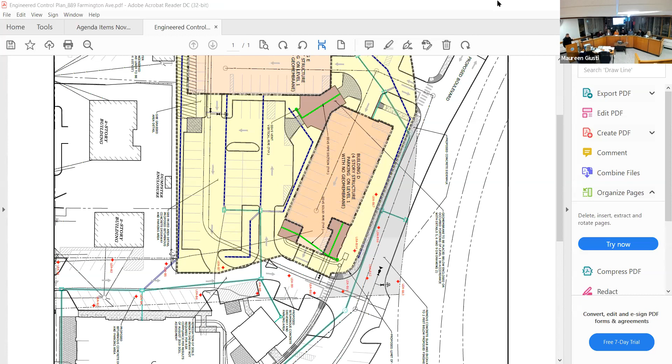Thank you. Again, Joe Perugini, professional engineer with Weston and Sampson. We have an office in Rocky Hill, Connecticut. The plan that I have, obviously you can't see it, but in your plan set it would be sheet 205. It's an overall site plan.

We're here on behalf of the applicant and owner, Kevin Budney, of Budney Overhaul and Repair. We're seeking a site plan approval for a proposed shipping and distribution building. On the property, it would be located in the northeast corner. This property is at 2061 Berlin Turnpike. It does have frontage on the Berlin Turnpike, but it's connected with other properties associated with the facility.

It's in the BT1 zone, and a lot of folks may recognize it as the former driving range. Currently, the development is to be located in the northeast corner because it would be situated adjacent to the existing facility and parking. It's going to serve the existing facility, which manufactures aerospace components and products. And this is a 5,000 square foot building, only for the purpose of shipping and distribution.

So it's going to have 4 overhead doors, a couple of man doors that face the north side. The pavement associated with it is only what's required for a driveway and for trucks to be able to maneuver into and up to the overhead doors.

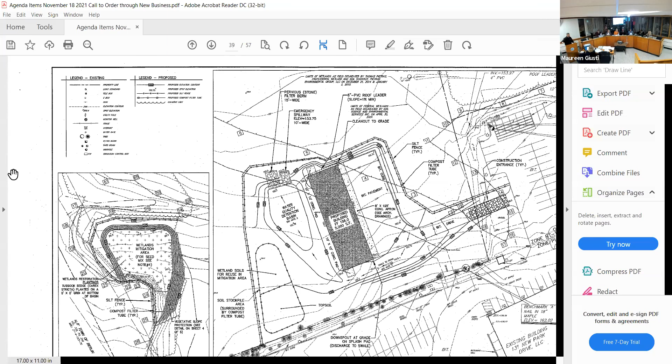I brought up the plan sheets on the board, but obviously his is in color and a little more detailed. On this plan, north is to the right, and the Berlin Turnpike is along the top of the page to help orient yourself. Along the left side of the page, which would be the southern border of the property, there's a strip of land that is between the southern property line and New Park Drive. You can't really see it there, but it's kind of sandwiched between New Park Drive and the southern border. That area itself is all wetlands, or mostly wetlands, and it's wooded.

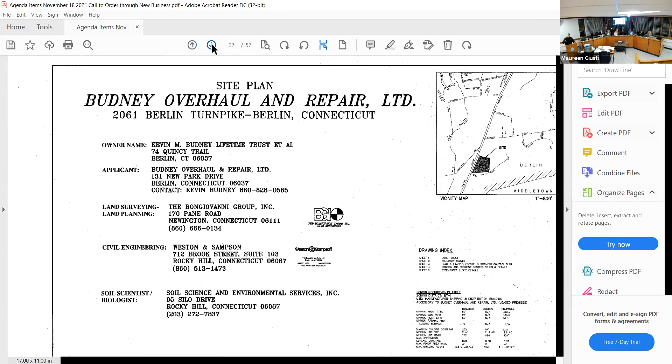But you can see within the middle of the property, we have red lines which indicate there's wetland soils that extend through there. It has been developed in the past, but the wetland soils are there. So because of where the proposed development is, a portion of it, the intent was to keep it obviously away from the wetland soils, but some of it is causing that disturbance. So this went before the Inland Wetland Commission.

It was presented, and to compensate for that disturbance of the wetland soils, we propose to recreate an equal amount, as you can see there in the southeast corner. So that is better suited and located to mitigate what's being disturbed, but it's also closer to an existing and better functioning wetland area. That was approved at the last wetland meeting.

As far as the development, I gave you kind of the specifics. In brown is the building. It's a 5,000 square foot building. There's not a whole lot to it. It's fairly simple. It's connecting to the existing parking lot.

There's no new parking required because there's a surplus of parking already there. So the 2 spaces that technically would be required for this would be used in that existing parking lot to the north.

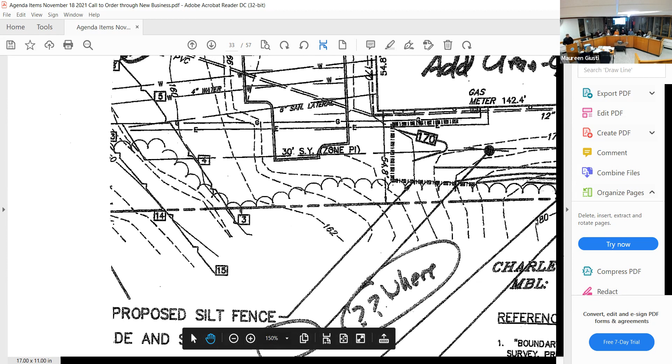Because we're proposing some added impervious area, you've got the roof runoff and the pavement runoff, we're going to offset that by having it drain towards the south or rear side of the building. It's just going to flow overland into, you can kind of see it's graded, it looks like a depression.

It's a pre-treatment sediment forebay. That will slow the runoff down. It will treat it, and it will create a little bit of detention as well. Then the runoff will have to pass through a stone filter berm before it continues, as it would naturally flow towards the west and south.

It's about a 1 acre area of work, so we're going to propose sediment controls. We usually like to double up our measures with a silt fence backed by compost filter tubes. That's the new requirement Connecticut DEEP is going for whenever you have steep slopes, or within an upland review area, or a nearby wetland area. There will also be an anti-tracking pad to help reduce sediment from being tracked onto the parking lot and adjacent road.

To complete the project, the area of disturbance will all be stabilized with topsoil and seeded for turf establishment. The next set of permitting would be during construction for a building permit. I believe the builder is here as well, in case you have comments on the building. That ends my presentation, I'd like to open it up for questions.

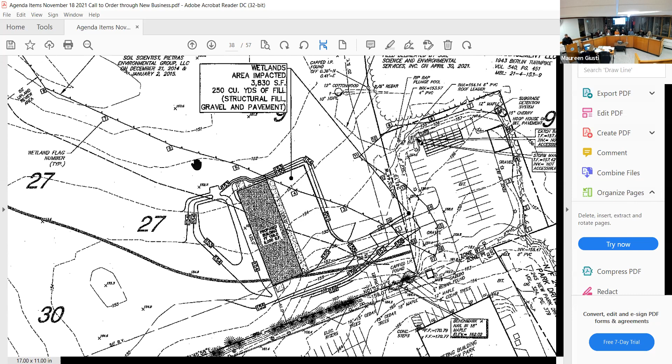Okay, terrific, thank you, Maureen. So I want to clarify for the commission that in your packet you have town engineer comments — those were inadvertently put in for this application. They were the comments for Budney's last review that you've already seen, in addition to his existing building. However, the wetlands review and approval was included in your packet dated November 10th, signed by James Corbel. We did not have architectural plans to review, so I hope their builder may be able to present to you what they have with regard to that, or I would suggest they get held off to show us those.

I don't have comments from the town engineer at this point. One recommendation is that when the error was found on the two separate applications, he didn't have time to prepare written comments. He did say he recalled looking at it and believes there was nothing outstanding that couldn't be resolved, but would be open to it returning to the commission if he found something that needs to be resolved. So the engineer is at this point satisfied, but he's going to take a closer look at it, and if he finds anything, he'll report back.

As far as the architecturals and what's going to be with the building, that's also part of this — I think he said the architect was here. Is there any questions at this point from the commission?

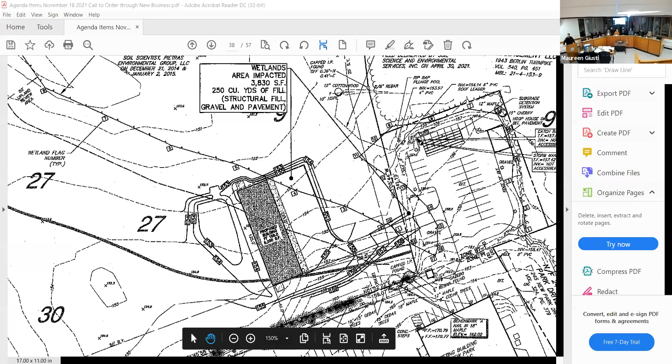All right, so what is the pattern as far as the truck travel goes — how are they going to enter into the site? So they will enter the site on New Park Drive, you can see that on the plan. That's the existing driveway of the adjacent facility. They'll use that existing driveway, head north to the right, take a left into that parking lot, and then turn down into the proposed driveway, which is the darker pavement color.

I'm trying to point with my hand — so this is New Park Drive over here, this is the existing driveway into Budney. Their main facility right now is over here. There's an existing parking lot at the far north end of their site, and the driveway into this addition, this new building, would be off of that driveway.

Along the park, is it pretty much just regular vegetation growth there along that way? Oh yeah, along the southern border. When you come in onto the park, is it heavily vegetated there along that road, or is it pretty exposed? This is New Park. You're talking, is it vegetated here or here? The driveway — yes, there's a fair amount of existing vegetation.

They're not going to be disturbed. The development is lower in elevation, so the driveway is going to slope down. This building will be lower than the parking lot here - there's several feet, 5 or 6 feet lower than the parking lot.

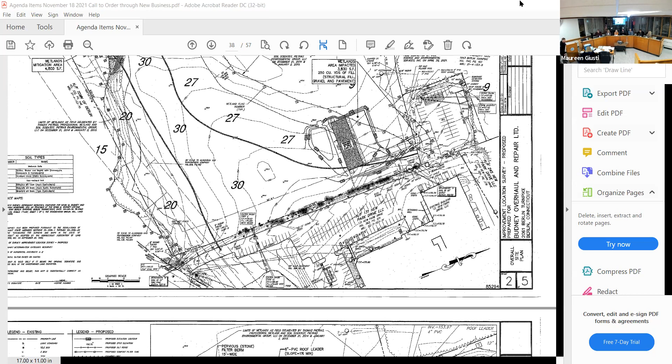And the hours of operation are pretty much Monday through Friday, regular business hours. No, actually they tend to be Monday through Saturday, probably two shifts. That building probably will not be used during evening or nighttime hours. Shipping is minimal, but it's basically a place to store their parts, finished parts, and then they carry them and ship them out afterwards. Right now, they have no room in their facility for storage of finished materials, finished parts.

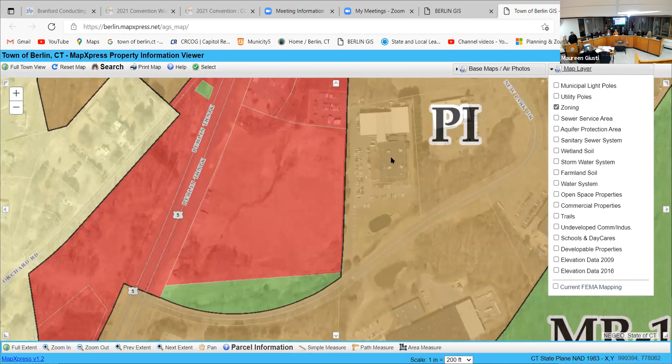Commissioners, do you have any questions? Oh, I'm sorry, that's right, I brought you up - waiting for my cue.

Okay, thank you. For the record, my name is Jonathan Festa. I'm with Pelletier Builders. We've designed the building. We've been working with Kevin for the last couple of years on this project, and I think you know he has other plans in the future. I'm located at 138 Main Street in Coventry, Connecticut.

Go ahead, is there anyone on the commission who has any questions at this point? Maureen, do you have any concerns or comments? I do not - it is a site plan application, not subject to special permit criteria, so it's pretty cut and dry as far as meeting criteria.

I do want to point out that you also have a letter in your packet from Chris Edge. I don't believe he's on the meeting - I can stop sharing and make sure. Oh, he's here, he's actually here.

The other thing too is we want to look at signage - or is there going to be any lighting? The lighting is, as Joe described, only going to be down lighting in the building. There won't be any parking lighting or street lighting. All right, and we do have a letter or communication from Chris Edge on this application as well.

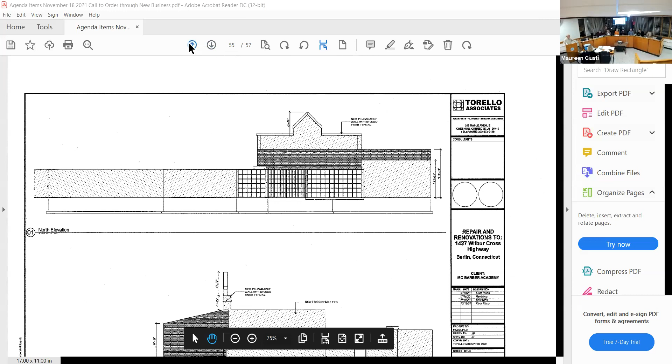Unfortunately, because the licensing procedure for MC requires you to have an address, when he came to discuss this with staff and this commission, it appeared to assume that the vocational academy was going to be located in the front section. So that was approved at that point.

To prove the point, if you drive up Berlin Turnpike coming towards the site, you'll see there's a billboard that is not in the name of MC Barber Academy. It's the name of MC Barber Shop. So it's a separate but allied facility.

So normally in cases like this, you would have a primary use on a site and an accessory. Now, the accessory use is the larger one. That's what he came in for by name. So that's why this happened this way.

So we just want to make sure that the modification we're coming in for now doesn't apply to a whole new site plan review. We want to use the existing site and existing building footprint at this point, because I think they have the right to use that, as long as they're able to reconstruct the part that was demolished.

So the elephant in the room is really one of the conditions of approval we need to address by going to the Board of Zoning Appeals. And that is the fact, if construction is still underway, do we have to remove the storage container on the site, which has been popularly called a shipping container. Of course, our argument would be that if it's not used for shipping, it's not a shipping container. Now they're used as storage containers. So the question is, can it stay on the site temporarily?

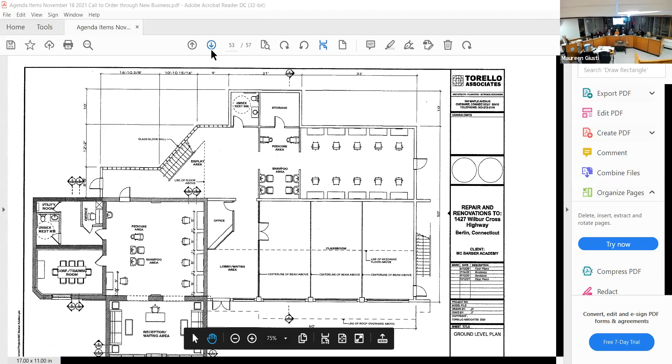As I stated, an affordable housing plan has been submitted and revised, and the architectural drawings have been submitted. The property is currently occupied by 5,248 square feet of motel consisting of 10 buildings with an existing parking lot capable of 11 parking vehicles. It is expected that the proposed residential housing project will be occupied or visited by 30 to 40 people on a daily basis. The plan provides for 2 parking spots per unit, with 1 parking space being a garage space. The proposed residential development is projected to generate 237 trips a day.

All of this traffic data is provided by Scott Heskins' traffic report, which was submitted with the application. It was actually more than the regulation required; the regulation requires only a traffic statement, but in case the commission thought a more detailed traffic report was necessary, the developer submitted a complete traffic report for the commission. The proposed residential development is supported by the existing infrastructure of the town, provides appropriate landscaping and screening, is designed to meet all emergency access requirements, is in harmony with existing neighborhoods, and meets the dimensional and development standards of the regulations.

The application is also consistent with the plan of conservation and development, which I think is very important. Most of the new housing developments along the Berlin Turnpike for the last few years have been set back quite a bit from the road. This will actually be a housing development set right up on the road, and it will be subject to the Berlin Turnpike design guidelines for lighting and other things. As the plan of conservation and development stated, what we're trying to do with the Berlin Turnpike is refurbish some of these older, dated projects into a more cachet type of housing project, and a more permanent, stable housing development. At this time, it's also going to provide affordable housing and housing diversity, all of which will benefit the town. At this time, I'll turn it over to Jim Cassidy to review the engineered drawings and other calculations related to the proposal.

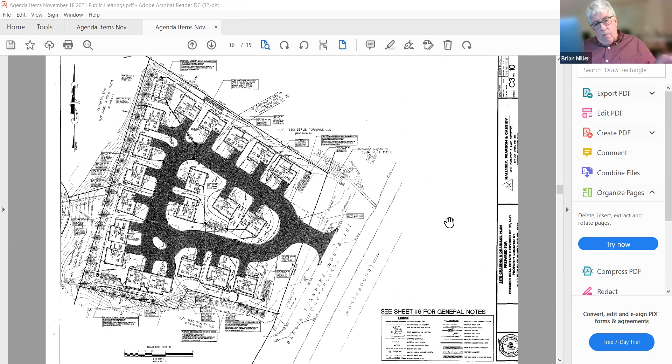For utilities, presently there is a water main in Berlin Turnpike. There'll be a new water service brought in along the main drive and then around the circle, providing individual potable water services to each one of the new units. It will also provide a couple fire hydrants to provide fire protection to the units within the development.

For sanitary sewers, as the property naturally grades to the west, there's presently an existing sanitary lateral that goes out to the roadway out back. It is a 6-inch lateral, which will have to be replaced with an 8-inch lateral to accommodate the units, but it will continue to go in the same direction with the new system tying into the cul-de-sac out back.

All other utilities - electric, telecom - will all be underground, whereas today they are overhead utility services.

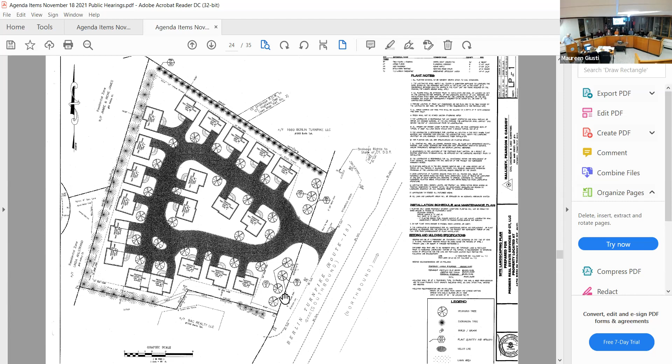Within the development itself, we're looking at having a series of street trees along the frontage to provide screening from the Berlin Turnpike. And basically what we try to do is create one street tree in front of each one of the houses, to give it that New England street feel with a nice ornamental tree in front of each one of the houses. In addition, one more page.

In addition, what we've done is typically want to dress up one of the units. So what we've done is provide a page - this is the foundation landscaping plan for each one of the units. So there's basically a palette. What it does is make a recommendation on shrubs and plants that should be planted along the sidewalk and up along the driveway. There's a table on the plan with plants that can be selected as appropriate for foundation plantings for each one of the units.

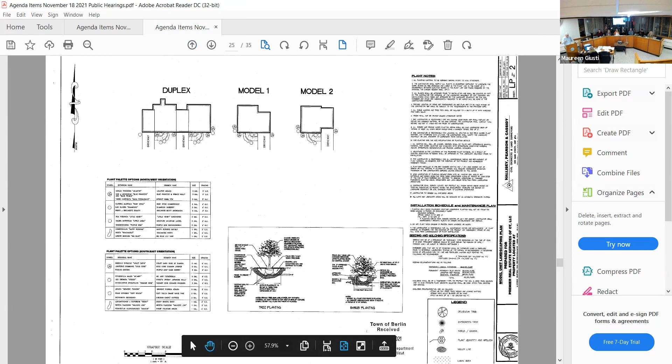We typically don't like to specify the same plants for all the units throughout the development, we like a bit of variety. That's why we create this table, so we can work as we build each one of these houses and have a variety of plants for landscaping along the frontage.

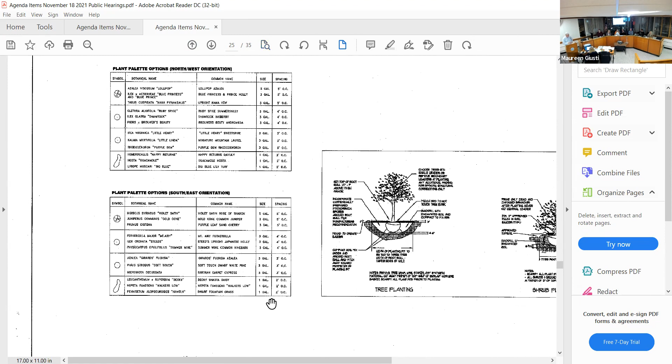The units themselves, between them, there will be no landscaping. They are about 10 feet apart, just a lawn area between each one of the units. And then along the back, again we're trying to create a barrier by leaving that existing evergreen hedgerow, and supplementing additional evergreens along the northern boundary line.

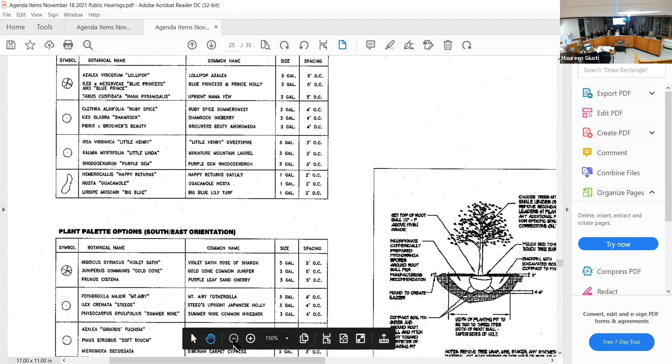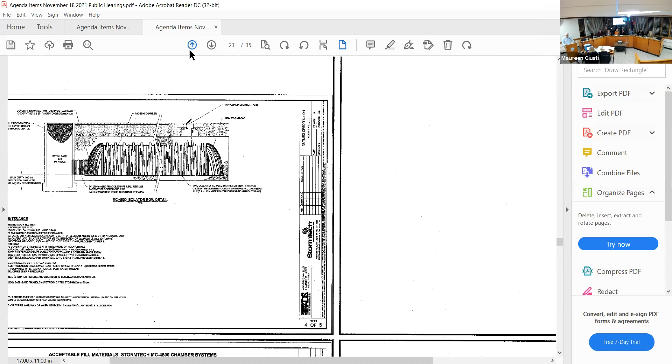We also have the zoning table on the plan. These are the zoning requirements of your new DD zone. Basically the requirements for this zone are at least a half-acre area, a maximum of 3 acres. We're at 1.89, so we exceed that requirement.

For front yard, we need 40 feet. Presently those buildings are about 7.2 feet off the front property line; we're about 42 feet off the front property line. Side yard requirement is 15. Some buildings are presently about 10.1 feet; we're going to be about 15.3.

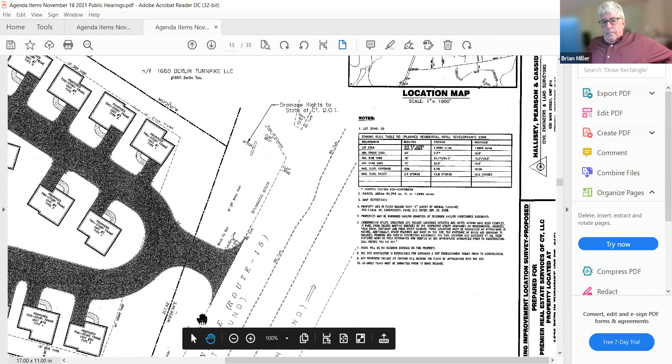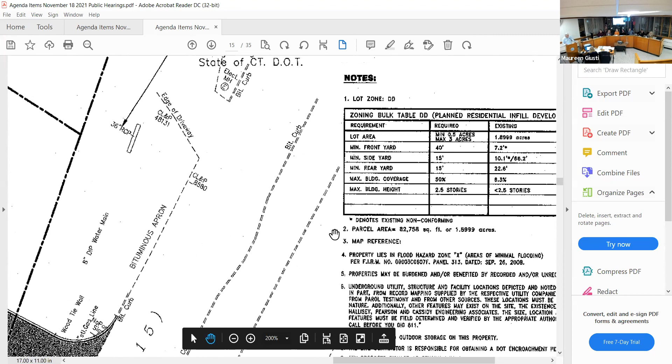Building coverage, we have a total of 50% allowed in the zone. Under this new zone, the existing is at 5.3 for building coverage because there are fewer units. We will be at 18.5, but still significantly under the 50% required by the zone.

And then the heights of the building - one gentleman asked me the height of the building, and I didn't have the architectural plans with me at that point. But these buildings will be 2-story structures, no different than a single family residential house. The roof pitches are going to be a 6-12 pitch, not a steep pitch. A typical 2-story house, your overall height would be about 24 feet.

So they're nothing overwhelming - nothing taller than the existing 2-story buildings that are out there, nothing taller than any 2-story house in the neighborhood behind us. They are very similar to what's in the neighborhood behind us.

So that's basically going to conclude my presentation. The only thing I'd like to bring up also is I know there's going to be concerns about impervious coverage. What I'd note is under these regulations, we're allowed to be at a total of 50%. We're actually, between buildings and impervious coverage, significantly less than 50%.

Because this is in the BT zone, the BT or BT1 zone, if it's developed as some other type of development, such as retail or auto sales, you could actually be at a total of up to 80% impervious coverage or 50% building coverage. So this affords an opportunity to have a development with a lot less impervious coverage, which overall is better for the environment, better for the drainage. So again, with that, I conclude my presentation.

I would say if you have any questions regarding the design of the building, we have the developer, Pat Snow, here with us who can answer any of those questions you may have. Okay, thank you.

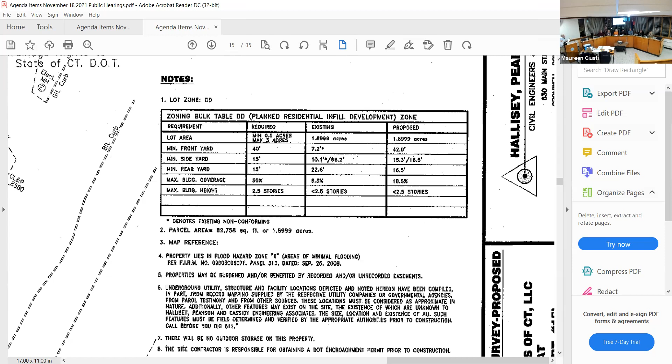And I would just ask Brian Miller if he could go through and do a summary of his affordability plan for the commission.

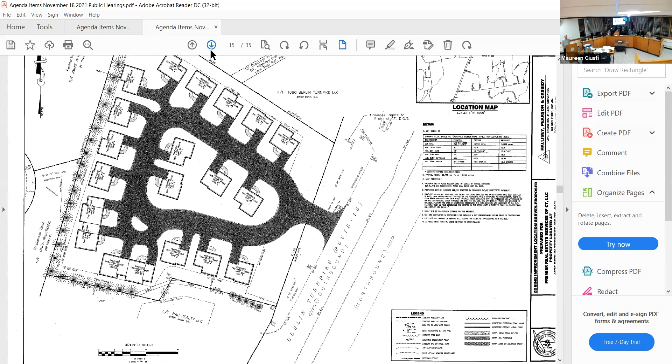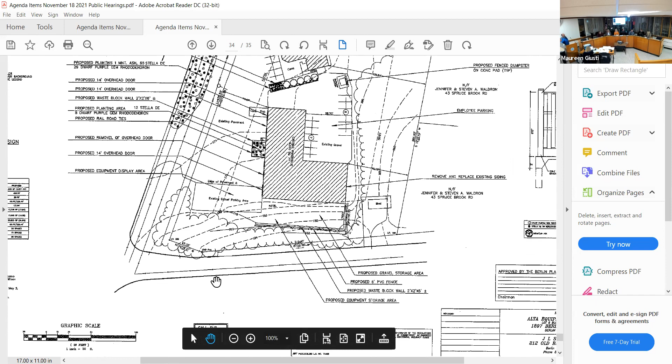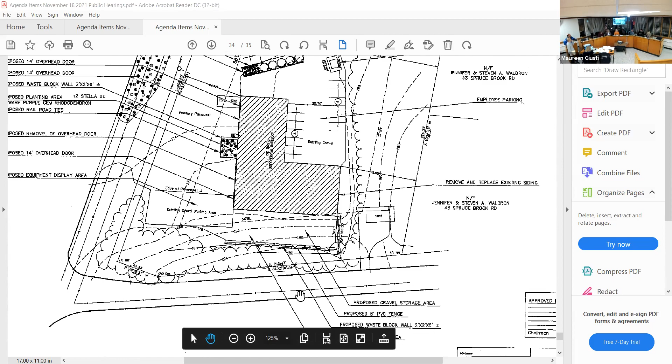But in reference to the landscaping, you go up a big hill in the back, Tommy, and then the houses sit up farther back there, can you even see it? Yeah, so if you turn around and look, isn't there all trees behind there? Yeah, so I think it's pretty thick, Tim, is what I'm trying to say. We have no intention of the existing, so there you go. See right there? So where the building is, the L-shaped building, where Maureen's arrow is, we did cut like up against that, probably 10 feet, and then along the side we cut 30 feet, and that's where that bullpen will be. But that dimension between the building and Spruce Brook is, like you said Steve, so much higher, and so is that first house.

It's pretty thick there. I'd be happy to infill if that's what you're requesting, Tim. But I think those trees are so mature. Whatever needs to be infilled, I don't have a problem with that, if it's thick enough around there, that buffer is strong enough for those residents.

Yeah. We just don't want, especially at one little house right there. Yeah, that one. Lord have mercy.

I didn't even realize that there's a little house that's ours, but it's SNET's. Yeah, right there, it's on our property, but it's SNET. I gotta check the title. No, they should be getting rent. Where's the rent? That's the little house you're talking about, but that is our property. That house is a neighbor's. No, it's small, more like a shed property, almost a shed building.